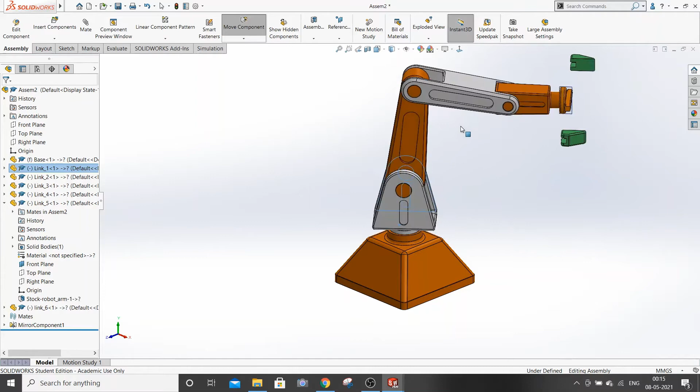The two green links are floating elsewhere because I have not completely constrained them, but we will do it later. So we need to take them to their zero position. So for now I will insert a parallel mate of this surface with this surface. I will select parallel and click OK.

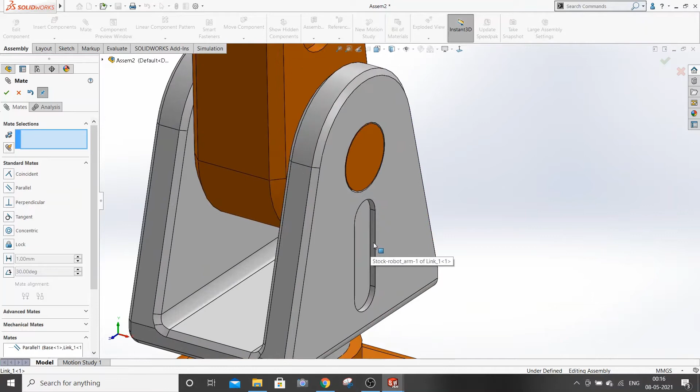I want this link to be straight when it is at its zero. So I will select this surface and this surface to make the two surfaces parallel, so that it will make this link straight up.

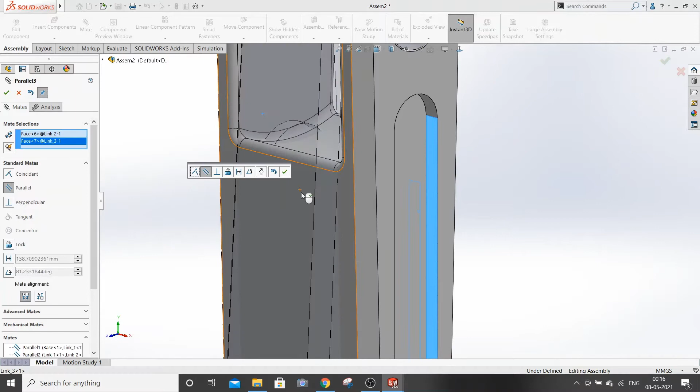Now I want this link to be perpendicular to this link. So I will select this and this surface and I will select a perpendicular type of joint. Click OK. Now I want this link to also be perpendicular to this link. So I will click here, select perpendicular, click OK.

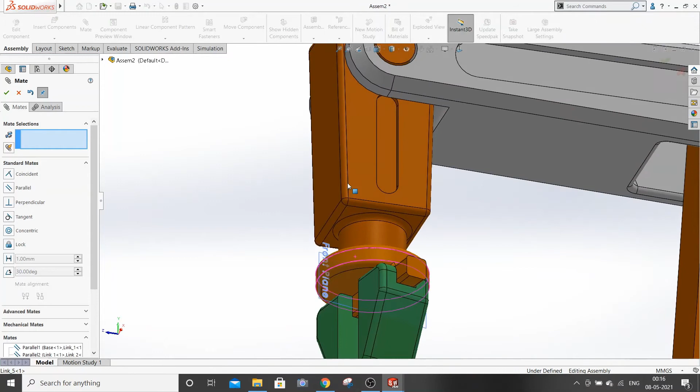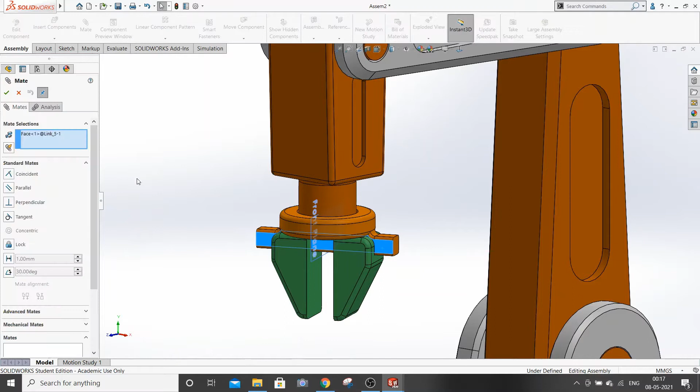Now I want this link to also be parallel to this when it is at zero. So I will select these two, select parallel and click OK. I guess there is some mistake there. So select this plane and this plane. I'm sorry, this plane is inclined, so I will select this plane and this plane and make them parallel. Click OK.

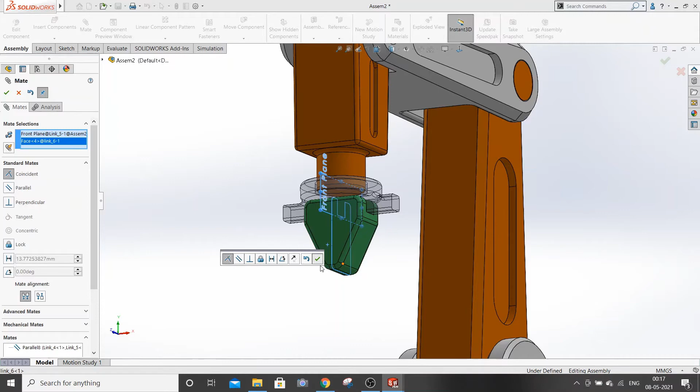And for now I will select this plane and this surface to be coincident. Click OK. So now the model is in all its zero positions. What I mean, you will understand when we set up the MoveIt Setup Assistant in ROS.

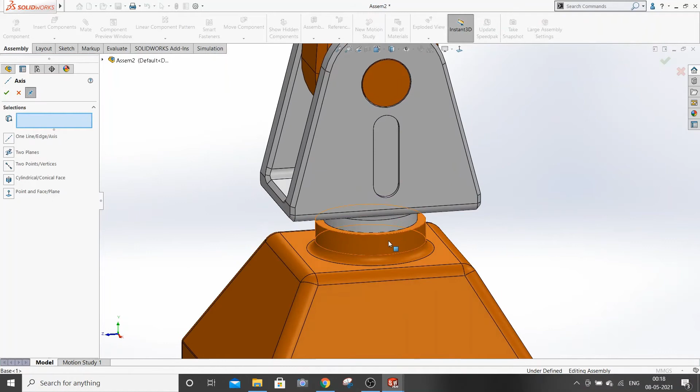So now we need to add all the joint axes. Go to reference, select axis. First of all, before proceeding, pin this axis menu. Now select this cylinder to add the first axis for the first joint. Click OK. Now to add the second axis, select this cylindrical part. Click OK. Now the axis will be created.

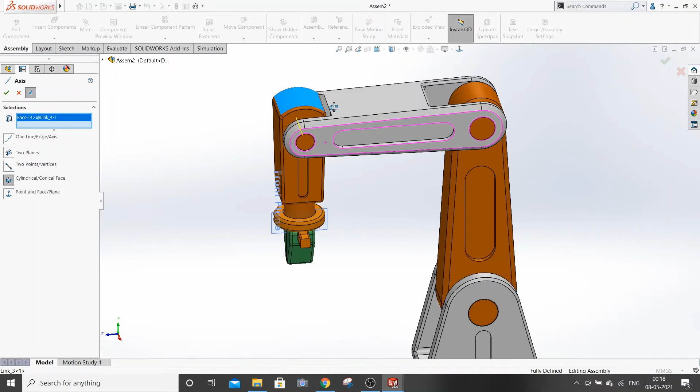Again select this surface. Click OK. Again select this surface. Click OK. For here, select this surface, click OK, and as this is our prismatic joint, meaning this will slide on this, select this line to create the axis and click OK. So now all the axes are created.

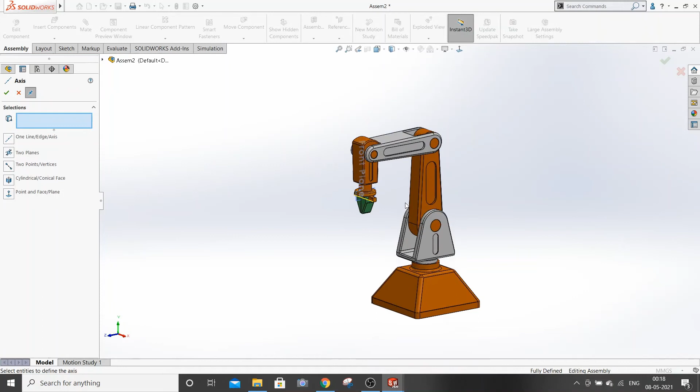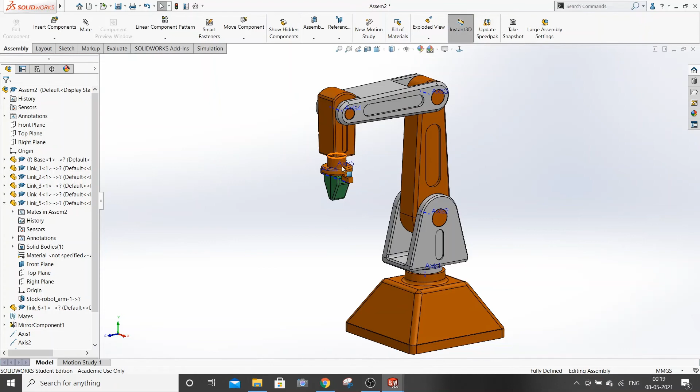Now we will exit from here, and from this menu select to show the axes. Now I will hide this plane. So we have created 6 axes: axis 1, axis 2, axis 3, axis 4, axis 5 and axis 6. Here our axis 5 is located and axis 6 is here. These axes are important because if you do not create them, the URDF file will not be generated properly.

So thanks for watching. In the next video we will see how to convert this model to a URDF.